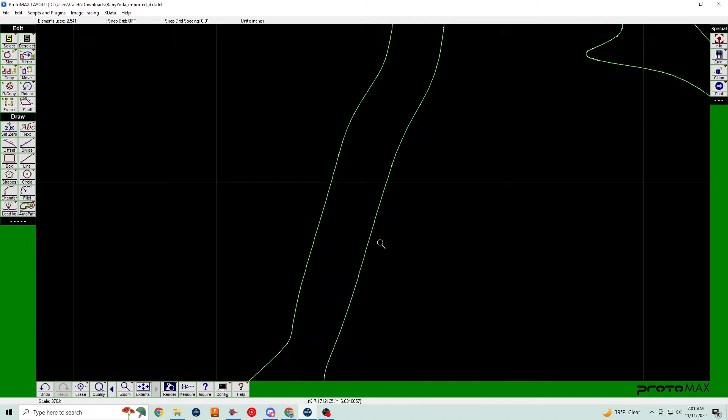So what we're going to do is we're actually going to import a Santa hat from some picture online, and we're going to cut it out. Now, I could draw the Santa hat by hand, but that kind of defeats the purpose of showing you guys how to use the automatic tracing that this program is capable of.

So what we're going to do is we're going to pull over a tab here, and let's go find a Santa hat image. It could just be basically anything. So we'll go to images here, and let's see if we can find one that looks like it'll be easy to draw. This one actually would work really well. It's got sharp lines and it'll import pretty cleanly.

So if we look here, we have the nice black lines. There's some shading in there, and I'm not sure how that will actually import. A little bit of shading on the bobble. This one would also work as well. It doesn't seem to be as fun though. The sharp lines don't really seem to work with what we're going for here.

This one would work as well. Again, we're looking for mostly the sharp lines. Now, if we were to use something like this, it's just a stock photo of, I'm assuming, something that's going to be sold. Those fuzzy lines, the fuzzy outlines, those are going to import terribly. And I may even show an example of that. In fact, let's go ahead and do that.

So let's get the good Santa hat file. Okay, so we're going to save image as Baby Yoda Santa hat. We got that. And then just for funsies, we're going to download this one as well. Save image as Santa hat test. So we'll do that.

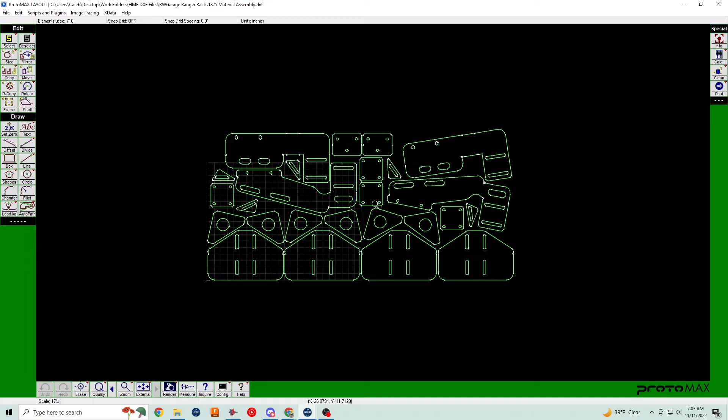Okay, so we've got our pieces here, and we're going to go ahead and go back into Omax, and we'll leave this here for now. What we're going to do is we're going to open up another file, and that is our Ranger utility rack bracket set. But we're going to open up a new file.

We're going to go up to the top here to image tracing. We're going to load an image for tracing. We're going to go find it in my desktop. So in this case, it's going to be my downloads folder. So this is the first one that I want to go with. So we're going to import this one.

Interesting that it didn't load. Let's do this one then. We'll start out with this one, and I'll go figure out how to get the other one on here. So again, fuzzy lines, they show up even weirder in the actual program, but we're going to go ahead and set it up for the automatic tracing, and we'll see what happens here.

So this is all just kind of information. We're going to hit next. It's going to ask you to load whatever image you got, and all the steps are up here at the top in these tabs. So if you have a bigger image, but you only want to trace a certain section of it, you can do that. We can narrow the window down of the units that we actually want to trace. We'll do that, and it's going to set it up. It's actually going to create the first version of it.

And we have a couple of sliders that can adjust the depth. Now, the black and white threshold is what's going to make tracing this specific one really hard, because the rim of the actual hat itself has those white fuzzies.

So we can drag it back and forth, and we don't get a whole lot of definition in the hat. It may actually be good enough, but it's going to be pretty hard to do anything with it. So let's just see what happens here.

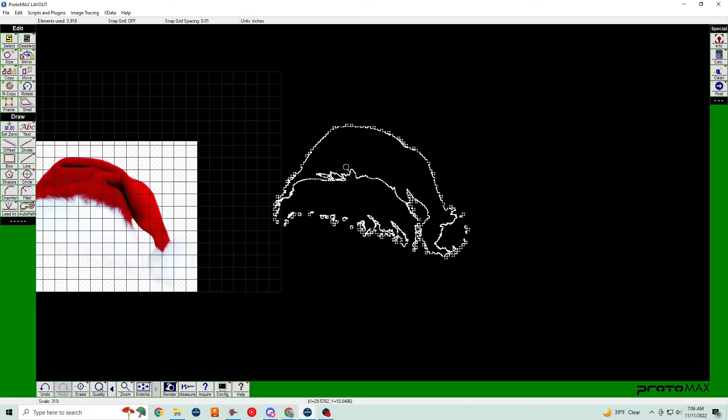So once we have that, we have our Santa hat. Now this one, it's just not what I would have gone with originally. I just wouldn't have imported this one. It's got the vector squares in the background, and it's just not what I want to deal with.

So I'm going to go new, and I'm not going to save changes to that. Let's go find that original file that I knew would be good. Let's do that. All right, we're back, and we had to go with this one. I'm not sure why that other file wouldn't load. I believe just the file type was probably protected of some type. So we had to go with this one.

We'll go ahead and get rid of all the sharp little features. Baby Yoda isn't a very sharp type of personality, if you ask me. So we're going to go ahead and proceed with this one.

We're going to do all the same that we did before. And look at that, we got a nice clean result. This is actually really good, and I'm not going to have to do very much cleanup at all.

So I definitely don't want all of that black section to be there, but I do want to sharpen the lines. We're going to smooth that out a little bit to make it a little bit easier to deal with. I'm looking at this line right here, and I'm going to try to keep that as my point of reference. Maybe it might go away in the future.

It kind of depends on how it looks once we actually put it on Baby Yoda. But for now, we're going to go ahead and play with the slider until we get a file that we like, and I think I like it like that. So we're going to go ahead and set that. Again, tracing outlines, I want all the inside and outside outlines to be cuttable and definable.

So we're going to hit next here, and look at that. Super clean, super easy. We are going to tune it up a little bit. Let's see if we can't get rid of some of the arcs, so like less arcs. It should create less entities, less nodes, and be easier for my CPU to process it.

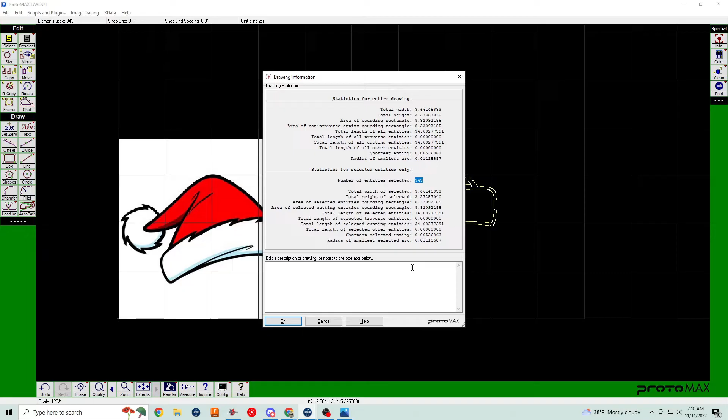Now we can go into the info here at the top right, and we can actually see how many entities there are—total length of all cutting entities and all this other information is here. The amount of entities total is 343. That other one had to have been well over 1,000, 2,000, maybe even more than that. And the more there are, the harder it is for your CPU to process it. We've had files that take up to 5 minutes to process. We don't have the strongest computers for the most part, especially for stuff like this, but they do okay for what we need them to do.

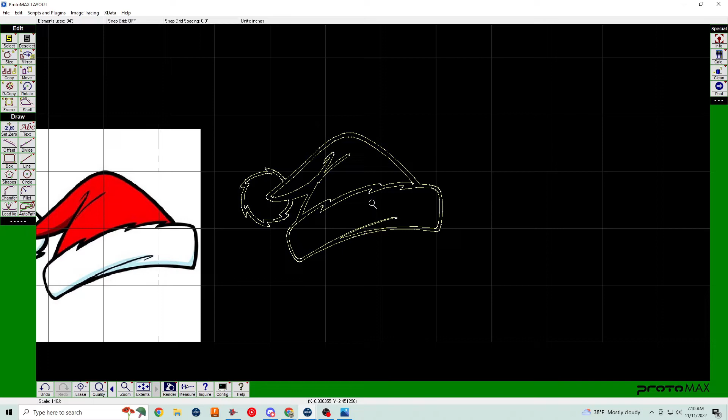But still, to take 5 minutes to process essentially a group of entities, it's a little excessive. So now that we have this, we're going to Control-C, and we're going to go open up the Baby Yoda file.

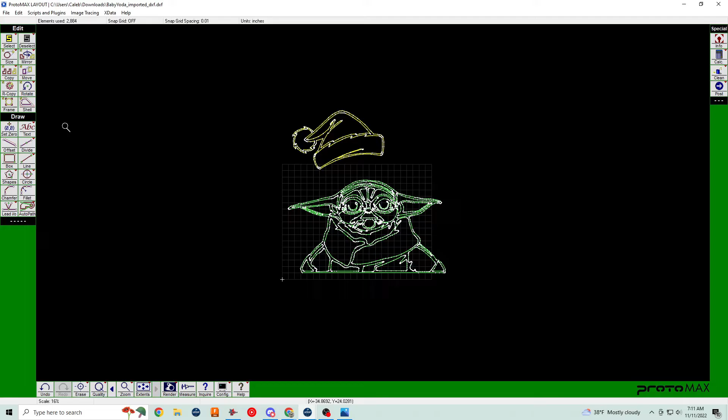We're going to paste this right on top of it. So we have it, and it's not scaled correctly. Obviously, that's a kind of small hat for little Baby Yoda there. So what we're going to do is figure out the size that we need to make this. I'm just going to guess, go to the size tool at the top left, and guess that I need to scale it up by a factor of 4. I'm going to hit OK, and that actually almost looks correct, doesn't it?

It's not bad, actually, we could go with that. We're going to roll with that. That's not a bad look for Baby Yoda. We'll set that up like that. So now that we have the size correct, we're going to go ahead and clean up some of the features.

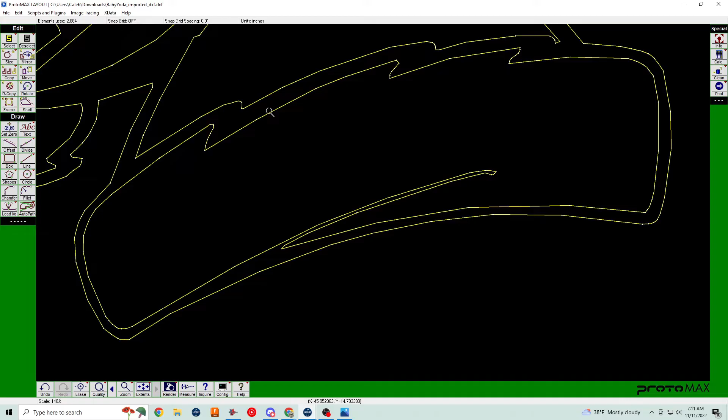Again, I didn't want any of these sharp lines. I want it to be a smooth arc with no sharpness in it. Baby Yoda, again, I don't feel has a sharp personality, so the Santa hat shouldn't have these sharp features. The only sharp feature you'll see in the drawing is maybe the tips of his ears, maybe. But even those are quite rounded off, and I made sure of that because I want everything to be a smooth drawing, a smooth cutout.

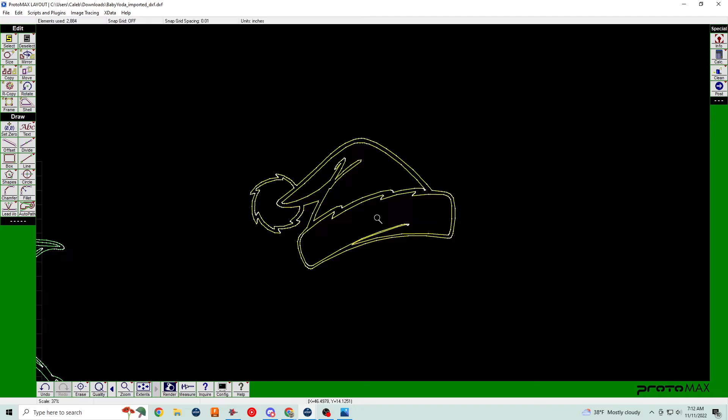Let's see, any other sharp features? Yeah, everything's pretty rounded in here, and so just to have these little sharp features on the hat, I don't feel it's correct to have it, so we're going to get rid of those.

To do that, first thing we need to do is convert this to a traverse quality. Again, if you remember the last video, the traverse quality is the quality that DXF files understand, every other quality. Apparently I didn't actually do that. Select everything, there we go. The DXF only understands traverse, all the other qualities are for water jets specifically.

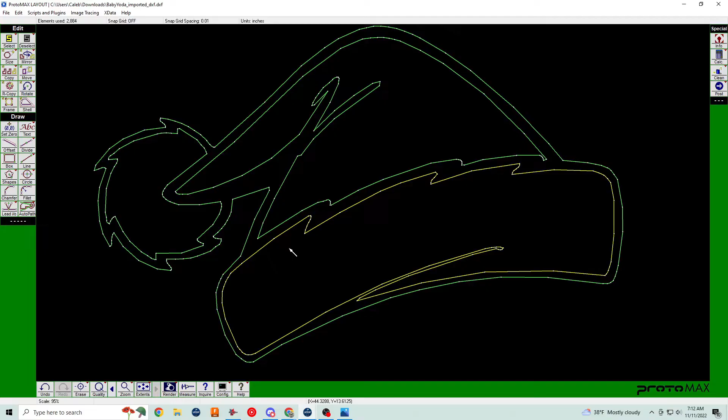So what we're going to do is connect this feature here down to this inside outline here, which you can see we just selected. To do that, what I'm going to do to keep everything consistent is copy and paste this entity, and move it from that end to this end. It didn't quite join, so I'm going to do that again.

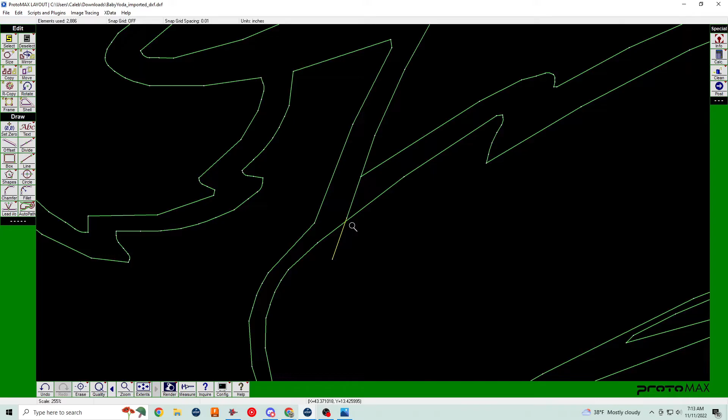Copying and pasting basically makes it so that this is all one consistent piece. They're all the same length, they're all set at the same angle, and so it intersects this. I'm going to zoom in on that, go over here, click on the divide tool, right click on it, and select divide at the nearest intersection. I'm going to click there, and then I'm going to start getting rid of some lines.

I'm going to deselect everything to make sure I don't accidentally delete something I don't want to. I'm going to get rid of that line. And now we have our intersection with which we are able to build off of. This would be essentially something that you can go forth with and kind of modify.

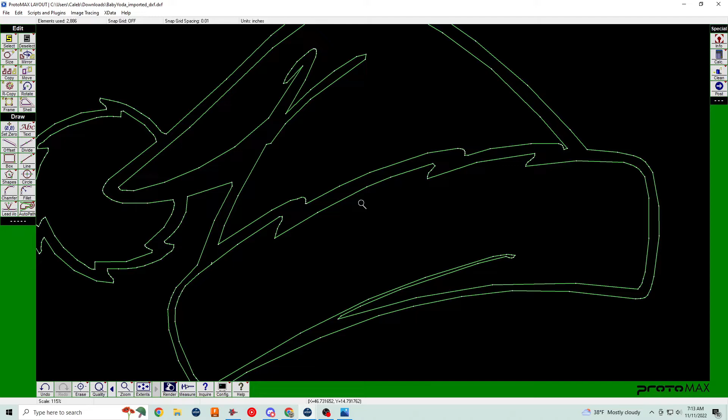Basically, I was looking for this node. I wanted this node right here because what I'm going to do is basically the same thing over here, except we already have a node and an entity right here. So now I'm going to get rid of that and that, get rid of that and that. And what that allows me to do is select these two right here for my point of reference.

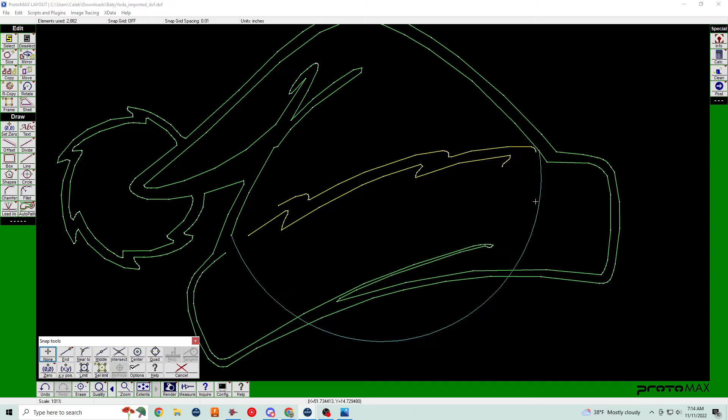To recreate this to not be so sharp, I'm going to right click here on the circle tool, hit a 3-point arc, and click on that. The start of the arc is going to be here, the end going to the end of this node over here. Now we can define the actual arc itself.

This is one of those arbitrary things that has no set answer—you can go up, you can go down, it doesn't matter. But we'll try to keep it kind of close to the way it was before. In fact, I'll set this using the near-to tool, which is down here.

So I'll click this and I'll just click somewhere around the middle of this top feature. I'll click and we get a nice smooth arc.

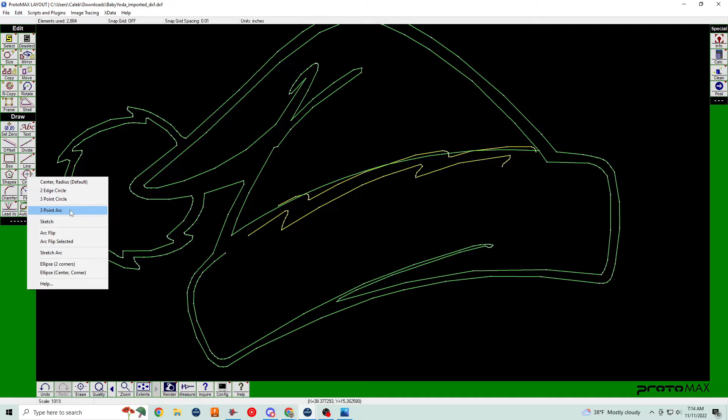Keeping the old feature selected, we're going to do the same thing with the bottom feature. We're going to right click on circle, then left click on 3-point arc from the end of this feature here, which remember earlier we had to create this node, to the end of this node. We're going to do a similar thing, but we might bend this one down a little bit.

Let's just do right here, just an arbitrary amount. And there we go. Now I'm going to get rid of this line, and we've already selected all of our features that we want to get rid of. So I'm going to hit delete. And there we go. We have a nice smooth Santa hat feature.

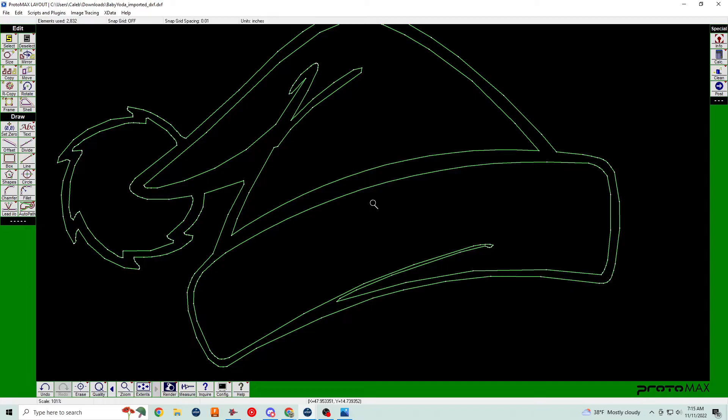So now we can work on getting rid of the sharp spikes on the bobble. Now this one might be a little interesting, but it's going to be a lot easier than you think. What we're going to do is break the bobble away from the rest of it so we can use the select connected tool to our advantage.

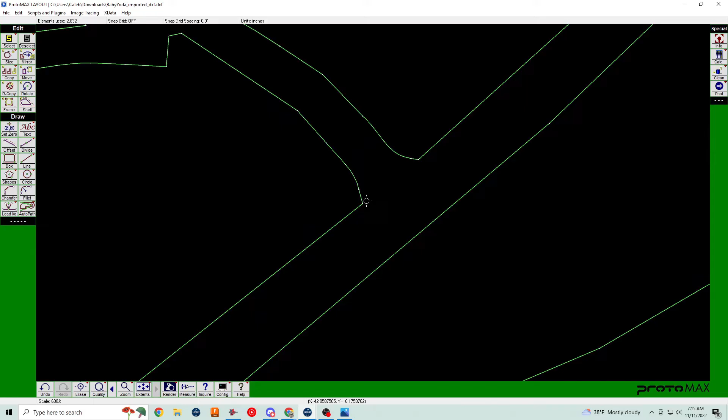To do that, we're going to zoom in on where it's connected to the main feature. Get rid of the smallest and last entities before it's connected to that feature. And it looks like we're good.

So to test that, I'm going to hit S on the keyboard, C on the keyboard. I'm going to click, and I see that I've selected the two features that I want to get rid of, but not anything else. So that way when I hit the delete key, those go away, but nothing else does.

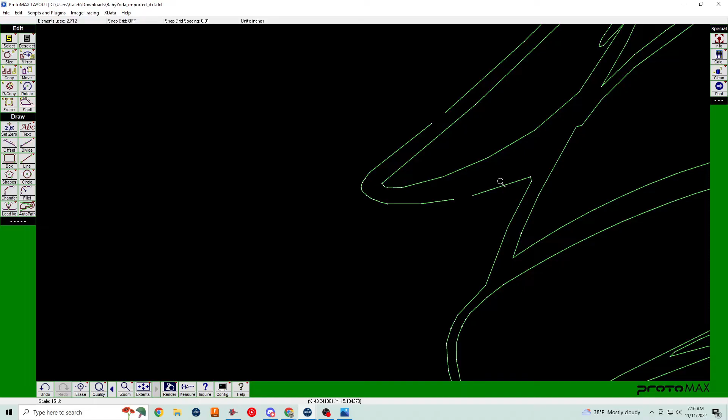So now what I can do is I can actually draw both of my circles. I'm going to use this end right here, this node right here, as my circle start point. So to do that, we're going to hit C and E, a circle to the end of, and we're going to draw the first circle.

We're going to draw it, maybe we'll draw it to the end of this node right here. And if we do that, it'll make it a little bit easier on us when we adjust everything in the future. So we're going to hit E and then click near that node, and we've got that circle.

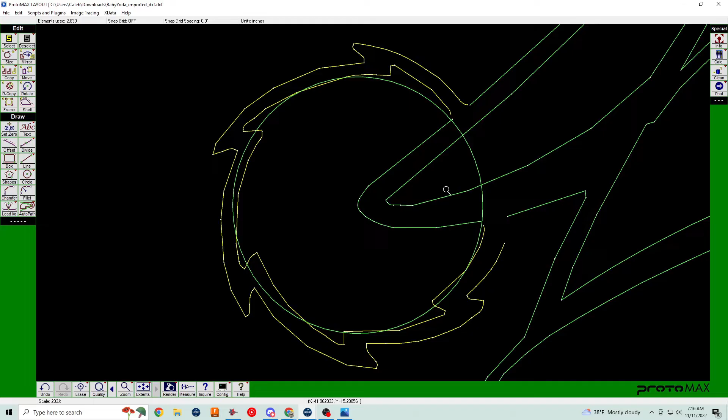We're going to do the same thing for the outer feature of the bobble. C, E, click, and we'll do the same thing for this end of the node right here.

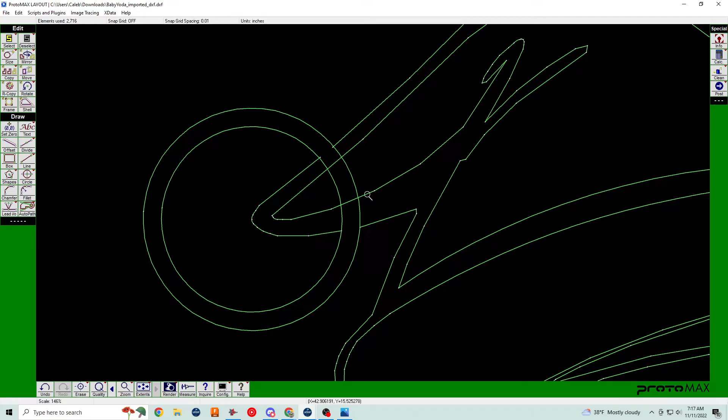We're going to delete all the old features, and we're going to get busy with some dividing. So we're going to divide at all intersections, everywhere the circle crossed over a feature that we want to keep. So here, here, there, and then of course there and there, we're going to get rid of.

We're also going to verify that there's an intersection at the joint, even though we use the end snap tool, we're still going to make sure that there's a node there. So we're going to click everywhere there's an intersection, and now it's time to start deleting.

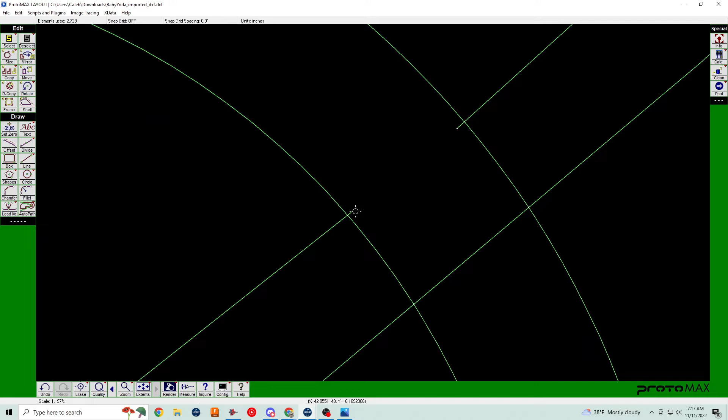So there and there, get rid of that one, get rid of these. Zoom back in on here, get rid of those, and there we go. And we've got a nice circular Santa hat bobble.

Now, it looks correct. It almost looks a little funky because it's not perfect. So what we can do is we can use an arc to kind of change up how, let's just say, how fun it looks, as opposed to sterile. We'll just use the word sterile.

So what we'll do is, now that we have our circle arcs, we're going to do 3-point arcs from everywhere the circle was created. And we're just going to fun this up. I just made that term up. We're going to fun this up to make it look not so consistent.

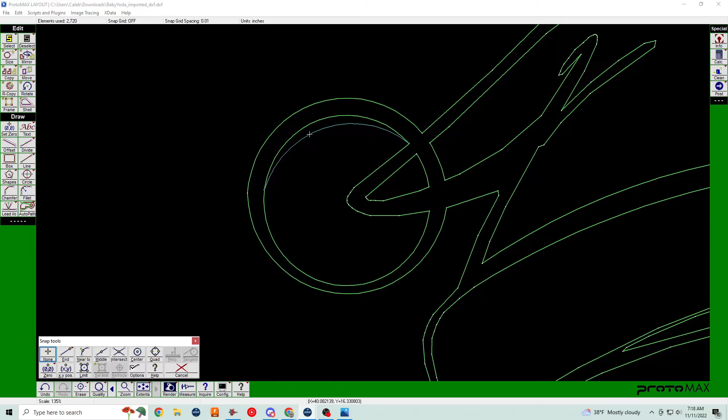So we'll change the arc for the bottom for the outside feature. We'll change the arc for the top on the inside feature. We'll just do one of those. We'll skinny that up. And that looks a little bit better.

You know, it's just artistic liberty. You can do basically whatever you want. There's no limit to what you can or what you want to do with this program.

So let's put this back over Baby Yoda and see how it looks.

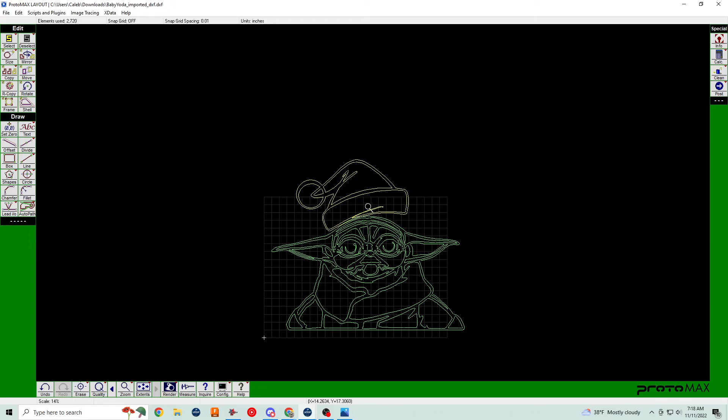Now, before we get too far, I just want to remind you guys that we are going to actually intersect the bottom of the hat with his head. So all of this will go away eventually.

That looks a little silly, but we'll change that up. We're going to drop this down quite a bit and intersect some of the features. It's going to take some time, so there might be a time-lapse montage.

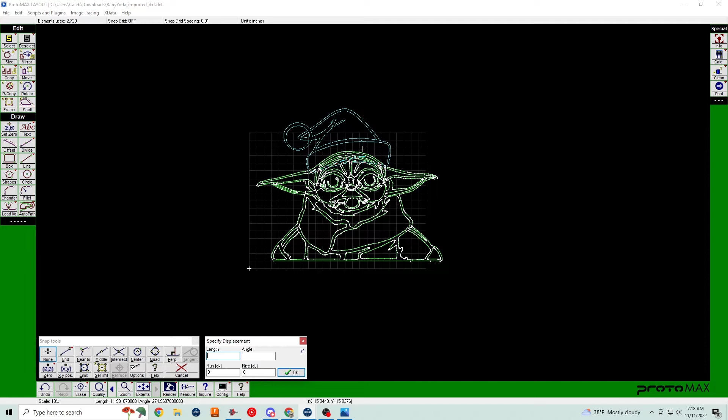For now, bring this back out. I decided I want to get rid of this little sharp doodad right here, which is really easy. I'm going to create a quick line from that node to that node to allow me to separate it using the Select Connected tool.

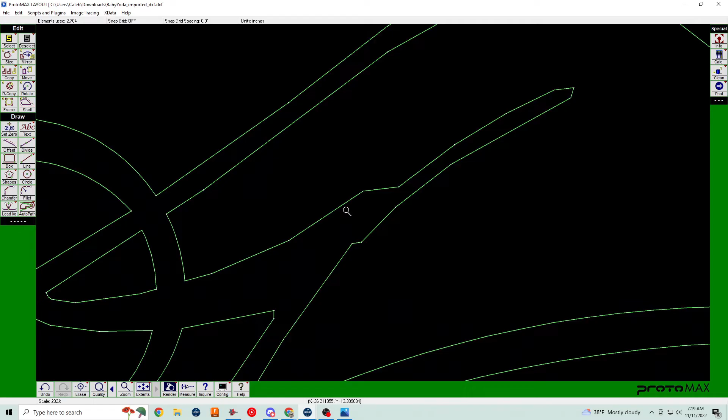I don't quite like how there's a couple of sharp jogs right there. I'm going to get rid of all of those. Right click on the circle tool, left click 3-point arc, end and end, and we'll hit that. That looks better.

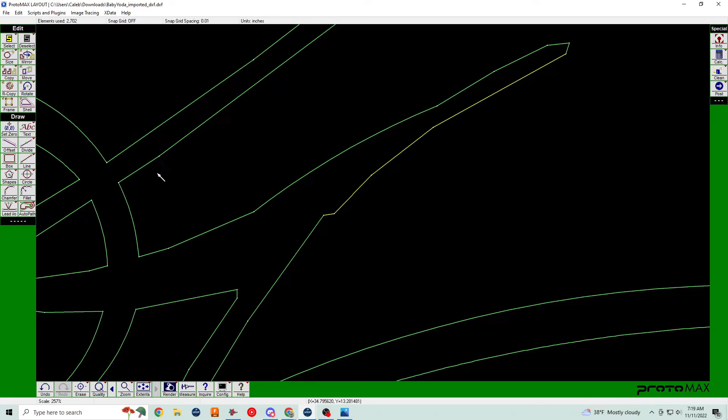We're going to do the same thing here, get rid of all that sharpness. Actually, we're going to leave those in as a reference before I go too far. Right click, circle, left click, and we'll do one of those.

That looks great. There's another sharp feature here. Just select those so we have them as reference. 3-point arc again, end to end. We'll just do something like that. And that looks fine, a little bit more fun.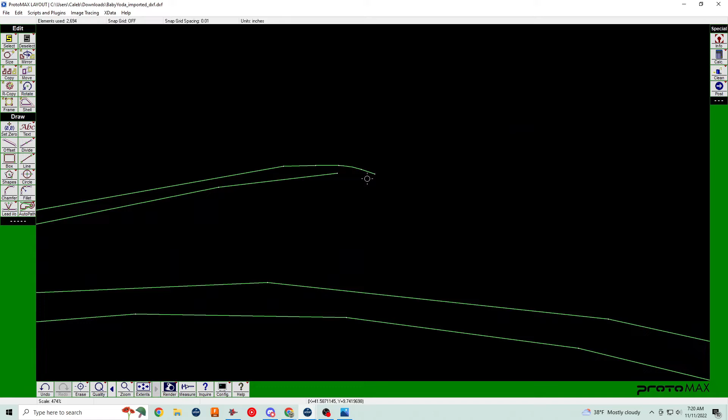We're actually going to get rid of some of this ugliness over here too. It's kind of small in terms of feature size, and I'm afraid the definition won't be super good on the waterjet. So we'll just do one of those, and that looks fine.

Everything looks great here. We can do a similar thing here. So in this case, right click, 3-point arc, the end of this near to this, because there's no node, so I just needed to do near to that line.

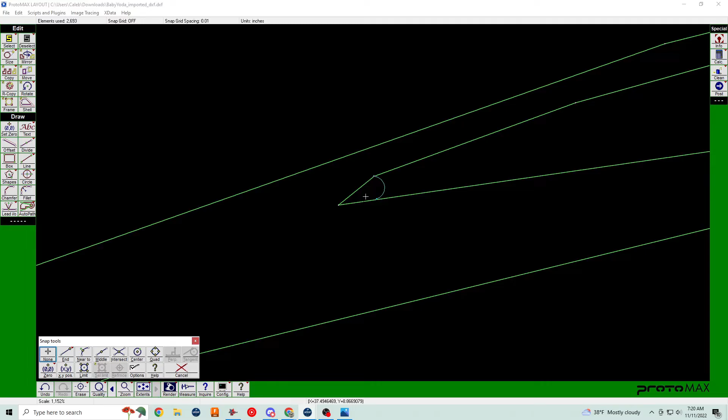It'll create its own node. I can get rid of those. And this looks pretty good.

So we're going to put this back over Baby Yoda and rotate it until it looks correct. It needed a little bit of adjusting. Or maybe we want it to be... yeah, let's just go for a little bit of a tilt, a little bit of a fun tilt. So we're going to fun this whole thing up, going for this.

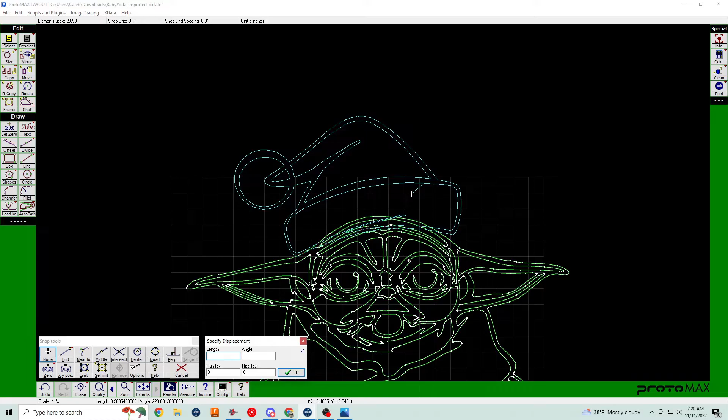So basically what I have going on here is a whole lot of hoopla. There's a lot of stuff to worry about here, but that's okay, we can adjust for that.

What we're going to do is use the quality tool to our advantage. That's going to let us pick individual qualities when we want to. In this case, I'm going to right click on the quality tool.

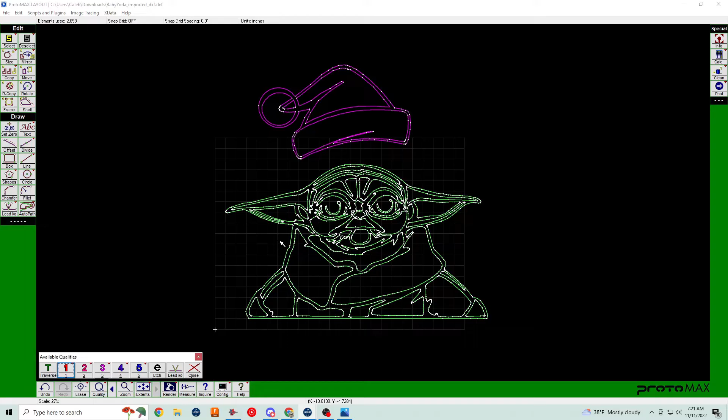I'm going to make it select a window. I'll select the hat here, and change it to the number 1, or the red quality. Or purple, I guess it's purple, whatever.

Now what I can do is, if I want to move only the hat, I can right click, select the quality, select - there we go. Apparently I did pick number 3, not sure how that happened. But now I can select the hat individually from the rest of Baby Yoda.

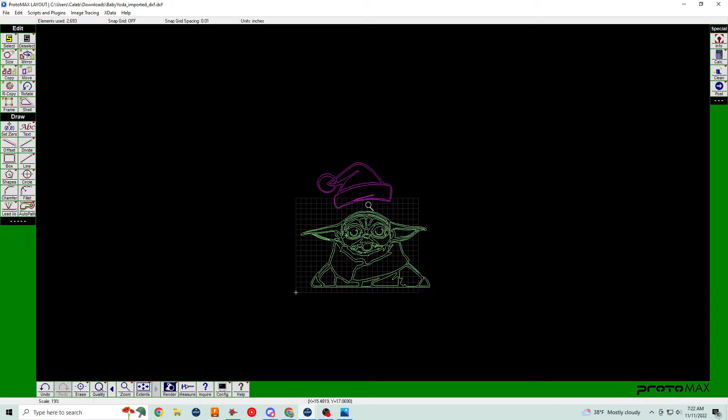So deselect all, right click, select quality with traverse, and now I select Baby Yoda. This makes it so I can identify which is which and not get the nodes confused easily, which can happen especially when intersecting a few different features like this.

So we're going to select everything here and lay this back over his little head. We'll do one of those. Let's go for that and we'll see how it looks. We can always back up and change it in the future if we need to.

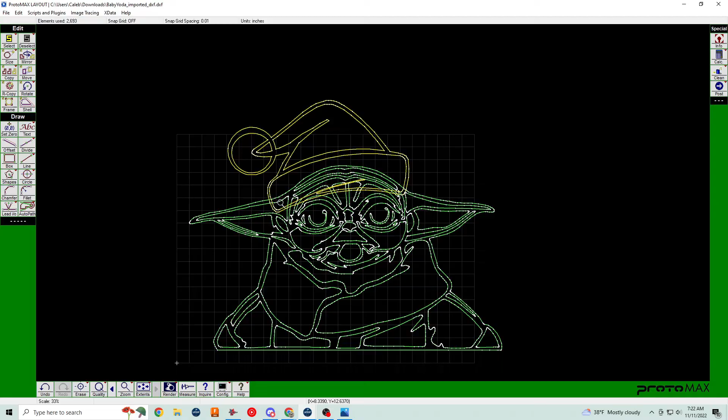What I'm going to do is intersect the hat with his ears by dividing it here. We're going to see how that looks. So click, click, click, and click. We're going to break all these to join them. There we go, now the hat is intersected with the ears.

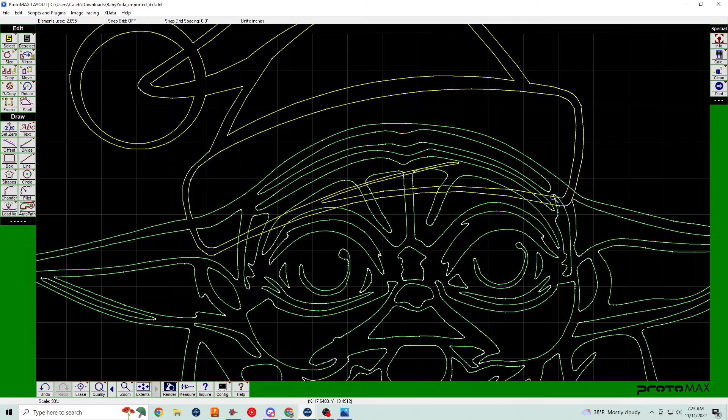Now, to get the hat to be continuous all the way over, we have to break it everywhere it intersects. But I'm just going to see how it looks with this part of the hat on top of him. I don't think it's going to look correct, but let's just see what happens when I do that.

So we have a weird intersection here, which is kind of annoying. What I'm going to do is get rid of that by doing another 3-point arc from here and here. Change that, carefully get rid of all of those. There we go, so we don't have a problem there.

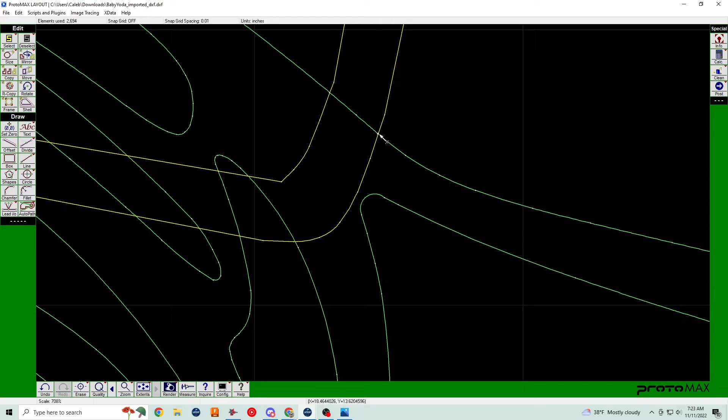Now we can do the same thing, divide it at all the 4 intersection points of this area. Get rid of that, and now we're going to get rid of all the features so they stay connected. Get rid of that, and that, and that. Now we still have this to worry about, and that's okay, not a problem. We can get rid of that.

We have another tool available to us, and that is the render tool. The program will only render non-traverse qualities, so everything other than a traverse. So if I just click render, it's only going to render the hat out. But this feature is handy because it lets us know what's going to drop out and what isn't, by the white and black negative and positive spaces.

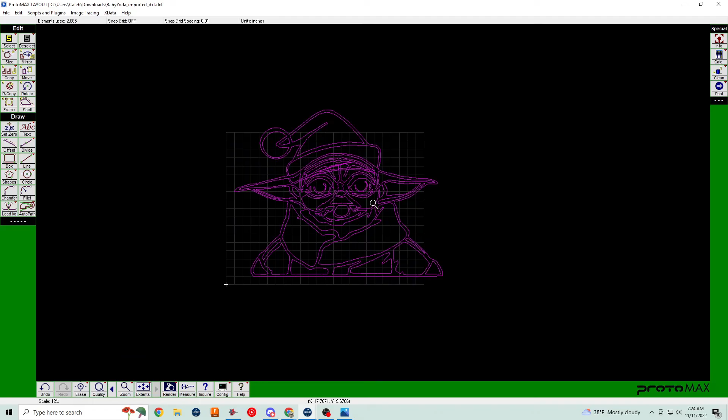So essentially, since there's an open path here, because this is the only purple quality, that's the only part that's going to cut out. Easy change. We're going to select all and change everything to the purple, or quality 3. We're going to render everything and see how it looks.

You can see there's tons of errors in it. There's tons of dropout, tons of missed features that aren't connected or are connected and shouldn't be. So we're just going to back up — that was just for demonstrative purposes.

At this point, what we're going to do is select all of the purple qualities, or number 3 qualities, once again, and I'm going to deselect a window because I just want to get rid of everything down at the bottom and just see how it looks. So I'm going to press D and W for deselect window.

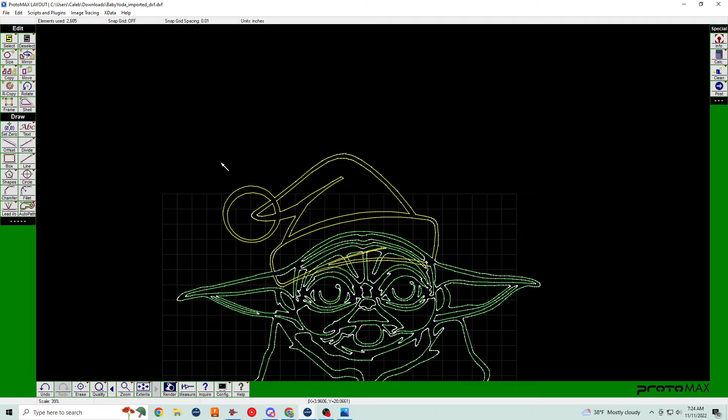Let's see how much I can grab. So I didn't grab everything. We're going to press D on the keyboard and just start manually clicking everything that we don't want to delete.

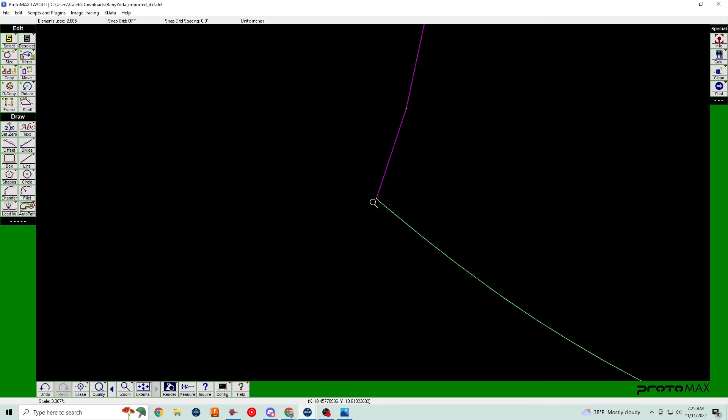Connect that. Make sure the same thing didn't happen over here. It did — get rid of that. Close that up. There we go, we've now got a Baby Yoda with a Santa hat.

Now, again, a Santa hat would actually cover his forehead, so all these forehead features are going to go away. But let's just see how this looks for fun. So right-click, we're going to select all, make everything the purple, or quality 3, and render this out to see how it looks.

And you can tell there's a few errors in it — nothing too major, we can deal with it. But the actual outline of it, I think it's not bad. It's a good start, so we'll back up here.

We will turn Baby Yoda back to the traverse quality, and put back everything that we deleted. Once we get to a certain point, I can just deselect everything, and that's all fine. So now that Baby Yoda's head is covered by this Santa hat feature right here, everything inside of it is going to be deleted.

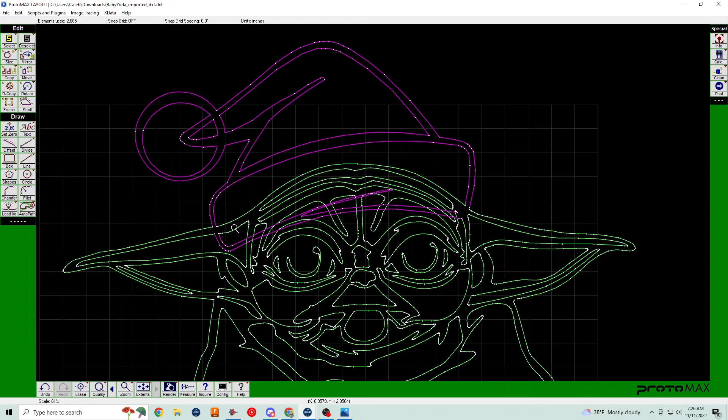So the easiest way to do that is by breaking a few of those entities and then reconnecting them later. So I'm going to get rid of that and that. Let's see, I'll break this here, and then that'll be it for now. So get rid of that one.

Let's see how far this can go. Okay, that's a start there. And this stuff takes time — it's not easy to set some of this up. The original Baby Yoda file itself took me probably 3 to 4 hours just to clean it up and get it plasma cut ready.

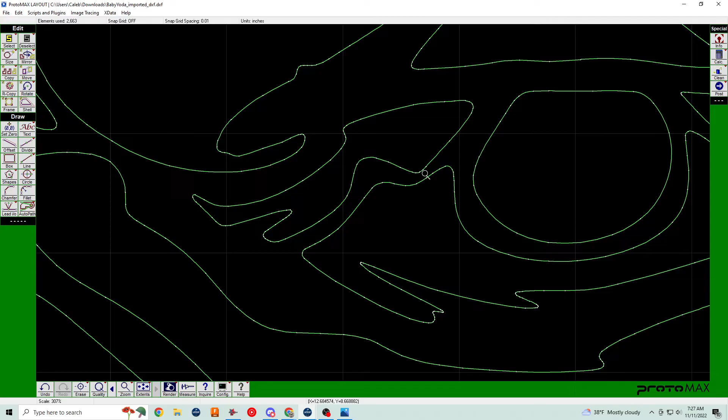Because I have to consider things like the distances between features. This distance right here is 0.07 — it's really close for the plasma. With the fine cut consumable, it cuts fine, but with anything bigger than the fine cut nozzle diameter, it's not going to cut out very well.

So at this point, what I'm going to do is just start dividing at the nearest intersection of everything that intersects with that bottom feature. We do that — click, click, click. This is going to be a difficult area to deal with, so we'll just skip it for now.

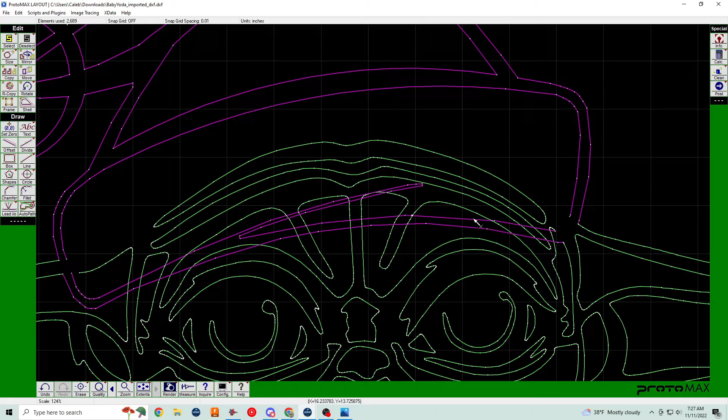Click, click. And I probably missed a few, but that's okay because we're going to go back and grab them anyways.

So now what I'm going to do is try to use the window tool to select as much as I can. And I selected some of that purple feature, so what I'm going to do is deselect all purple qualities, delete.

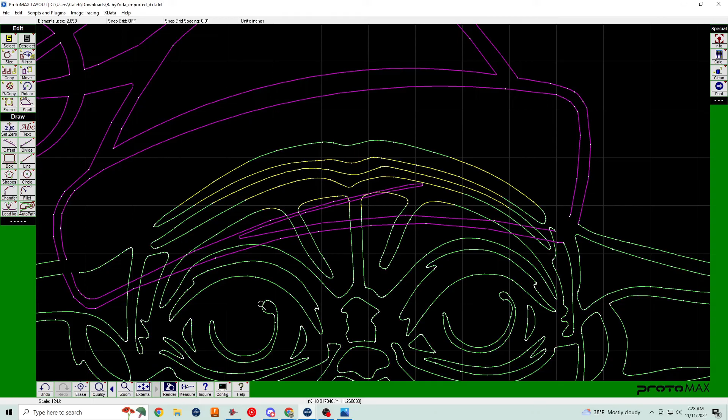There we go, so now it's a little bit more clear, we have a little bit more clarity on what we need to do here. So get rid of that, that, that. Let's see, grab that, so we can grab this as well. And yeah, right away you can tell there's a few entities that obviously didn't get deleted.

So we're going to go ahead and make sure that there's an intersection at those entities. And at this point, I think we're going to start working individually. What I mean by that is we're going to zoom in on each section and take care of it individually as opposed to looking at the whole program.

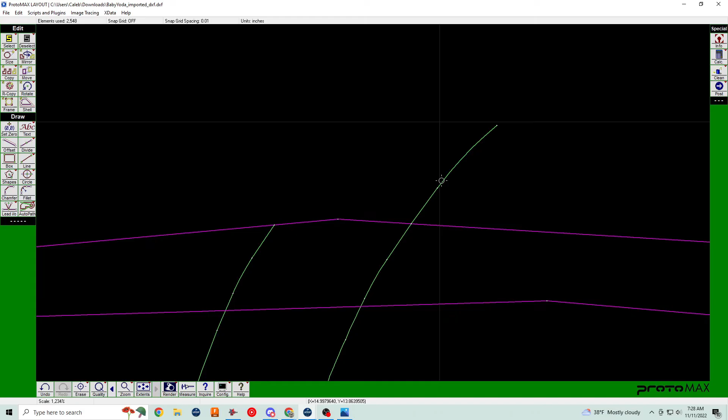Go over here, we can get quite a bit here. That looks like it was already divided. We're going to do it again just to make sure. It doesn't add an entity if there's one already there, it just verifies that it was taken care of. So we'll get rid of this.

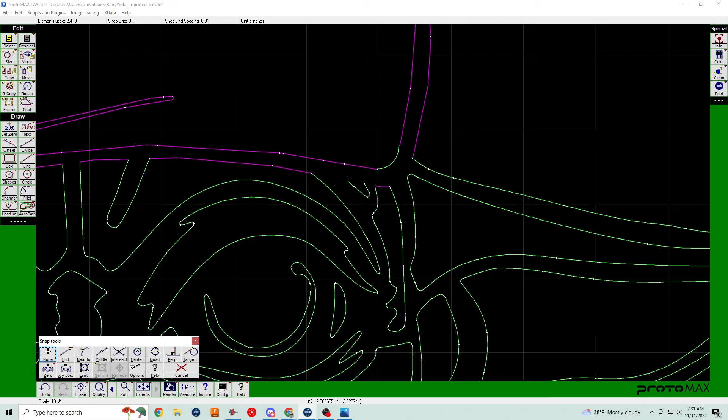All right, we're back, and this looks pretty good. A couple of changes I want to make. Here, get rid of that sharp little corner guy right there. Maybe we'll fillet that at a big fillet so it smooths it out. We'll do about 0.2. That smoothed it out, that's good.

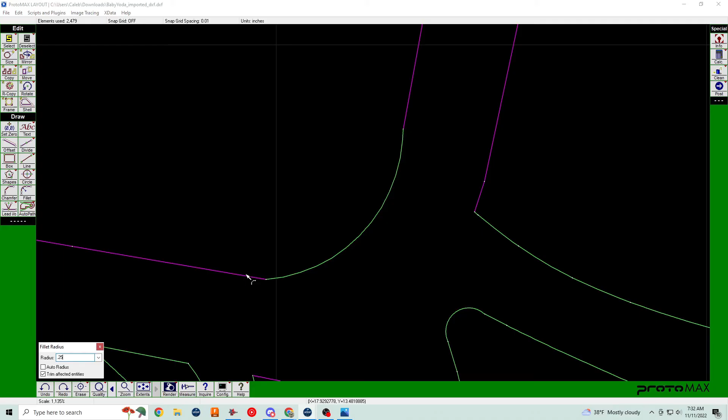All right, so now we have a pretty good Baby Yoda drawing. Oh, a couple of problems. Looks like we need to connect this. That looks fine. Oh, we need to break that right there, I believe. Is that what happens? Yes, we need to do that here.

Oops, let's back up and look at this a little bit closely. So we've got a double feature here that needs to be broke. It needs to be broke somewhere. How do we do this?

So what we're going to do is get rid of this and that, and we see a feature here that needs to be enclosed. Enclose that, that is all one contiguous feature. We can verify that - yep, looks like the connected tool grabbed it all, or most of it at least.

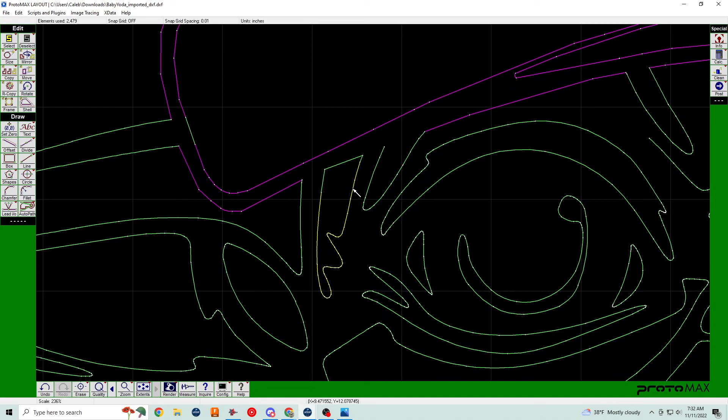That's fine, so we have this feature to deal with. To do that, we're going to... how are we going to do this? Now, it's not that big of a deal...

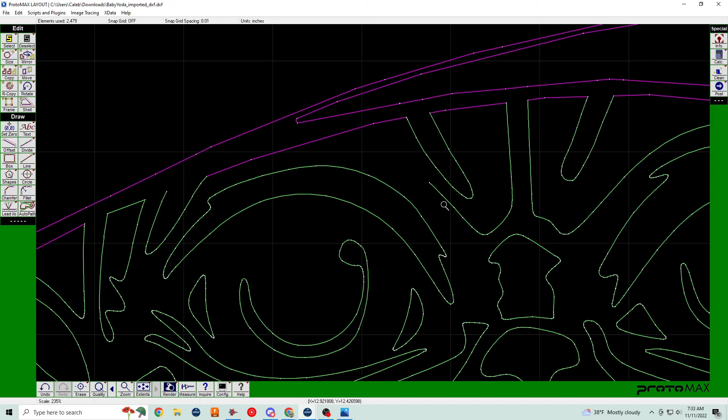...to leave an open path in the drawing, but when you go to CAM, when you go to post-process this in CAM, what's going to happen is it's not going to offset all the other features correctly, or it may have a hard time doing it depending on which CAM software you end up using. So we're going to take some inspiration from the other side here to figure out how to set this side up.

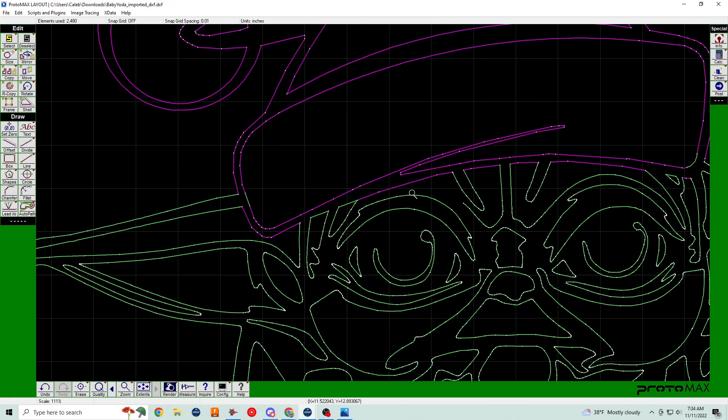Yeah, it looks fine, actually looks great. So we have an entirely enclosed feature, closed feature, closed feature. Everywhere's good, I know the rest of the file is good. Let's see here, this looks pretty good.

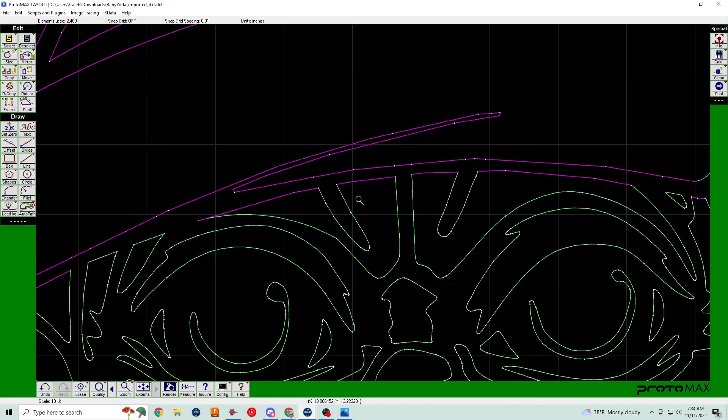We can get rid of a couple of nasty entities. We'll just put some auto fillets in. Let's just do that, get rid of that one entirely. Oh, too much, let's do that. Get rid of all of those, actually. Same thing here, get rid of that rogue node.

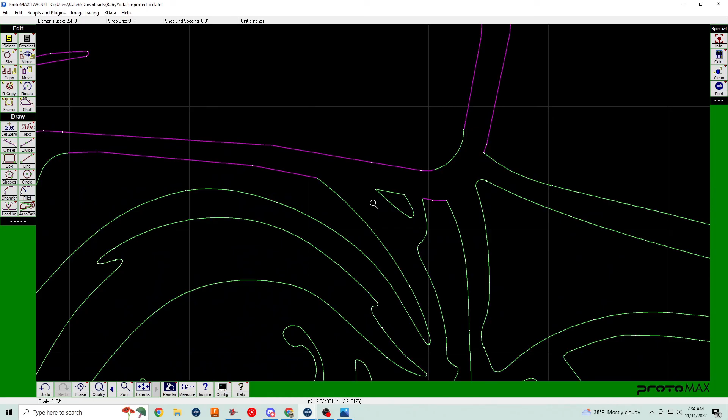This looks not too bad. Okay, so what we're going to do, we're going to go ahead and select the quality of all, change it to purple so we can render it out. Let's render it out and see if we missed anything. There might be an unenclosed path somewhere.

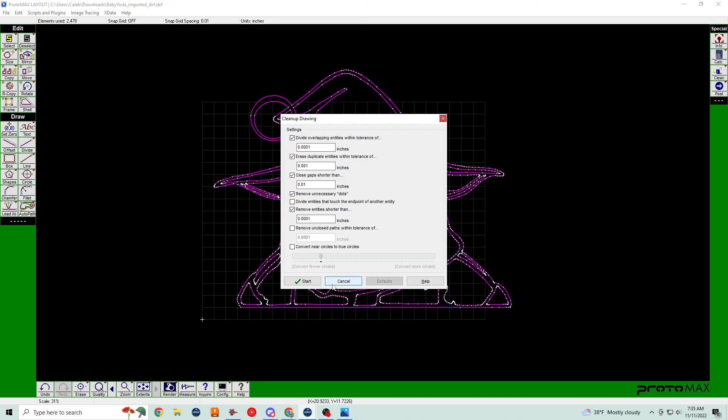So what we're going to do is go over here to the Clean tool. Now the Clean tool has a bunch of neat features that'll help you out. And for the most part, the defaults are totally fine, that's what we're set at right now. We may need to change those. Let's just see what happens here.

So we're going to start - 835 gaps were identified and closed. Let's see what that did to our render. Perfect, that is it, that is all that we needed to do to get this taken care of.

We have a good, clean, cuttable Baby Yoda file with the Santa hat on it. And we're going to go ahead and get this cut out, and let's see what it looks like.